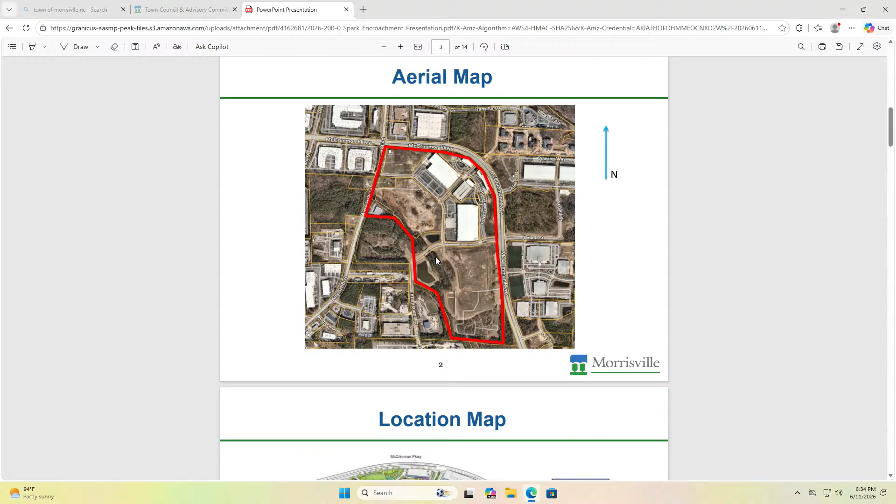Just additional orientation, here's an aerial map of the area. Outlined in red is basically the entire development area for Spark. Some of the buildings, as you can see, are already existing. It's just east of Airport Boulevard and adjacent to the McCrimmon Parkway extension to the north.

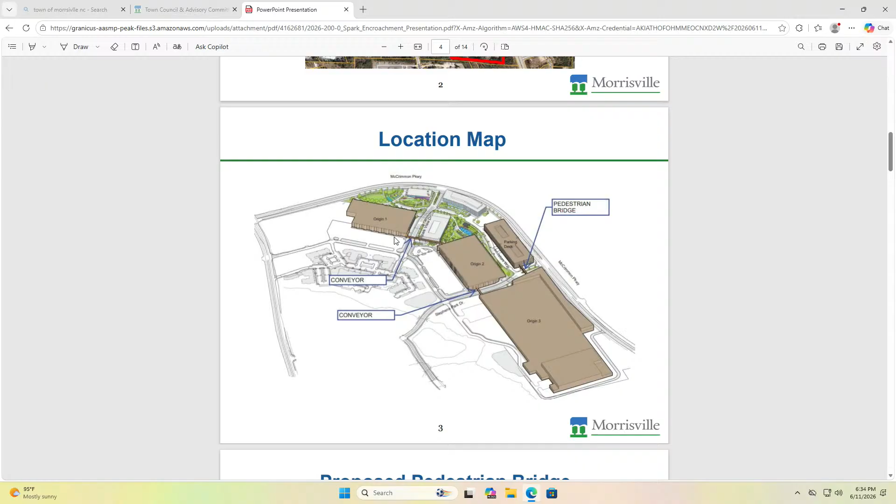So looking at this rendering, this helps orient us a little further. You have the location of the 3 bridges. There's one here that connects the parking deck to Origin 3 - that's going to be a pedestrian bridge. You have another one being proposed here - it's a conveyor bridge connecting Origin 2 and Origin 3. And then another conveyor bridge that connects Origin 1 to Origin 2. We'll get into some more details with that.

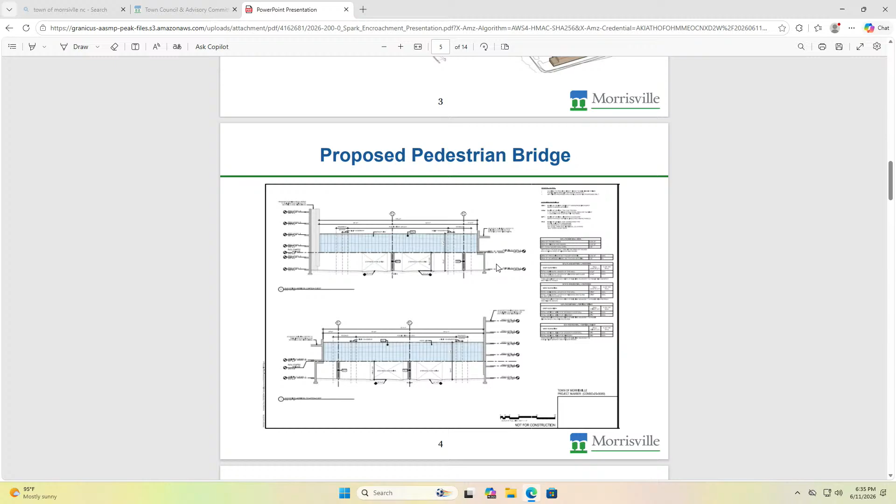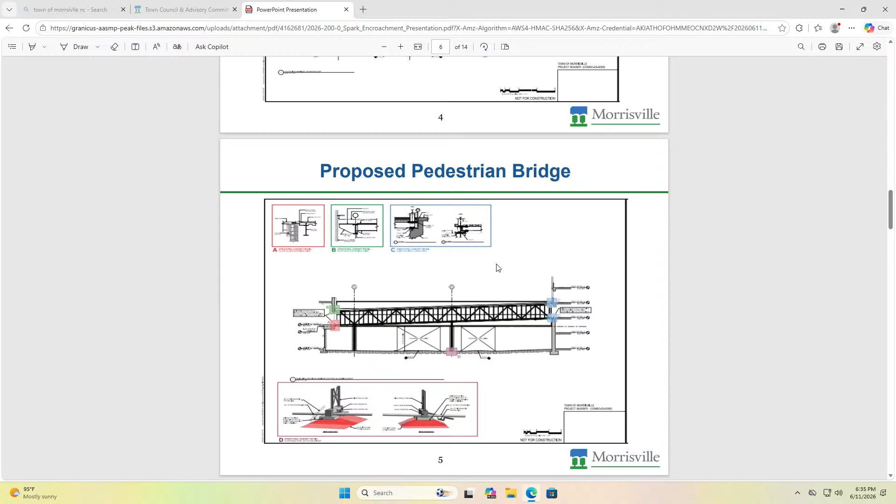So we have some structural elevations of the bridges, and the applicant has a presentation as well that's going to provide some additional renderings to make it a little more user-friendly to see. This is actually the proposed pedestrian bridge. It's going to be a steel structure cladded with glazing, so from the outside you'll basically see a glass bridge that overlaps the public right-of-way. You can see the internal section of it where it's made out of steel structure. This is a pedestrian bridge just so people can get from one building to the other.

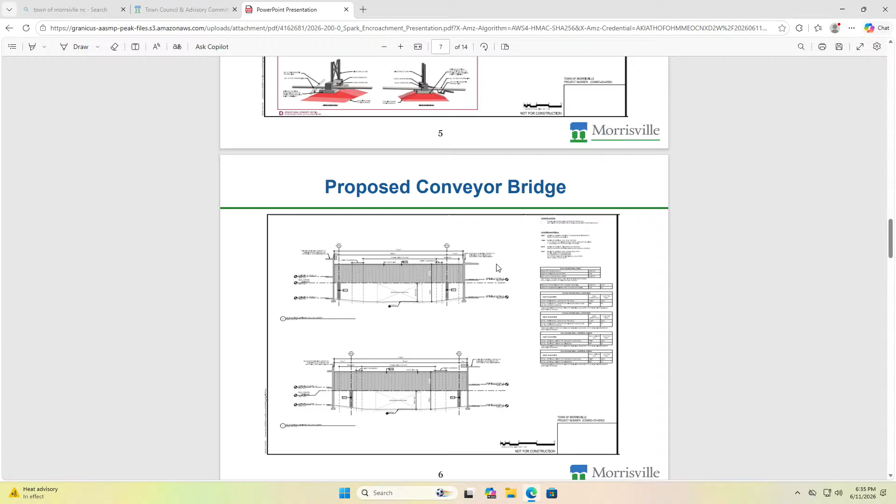And then there'll be two conveyor bridges, very similar in design. They're also steel structures, but these will be cladded with some kind of panels to match the architectural style of the existing or proposed buildings at Spark. There'll be some better renderings that you can see in a few minutes. Again, this is the internal structure of the conveyor bridge and our steel bridge structure.

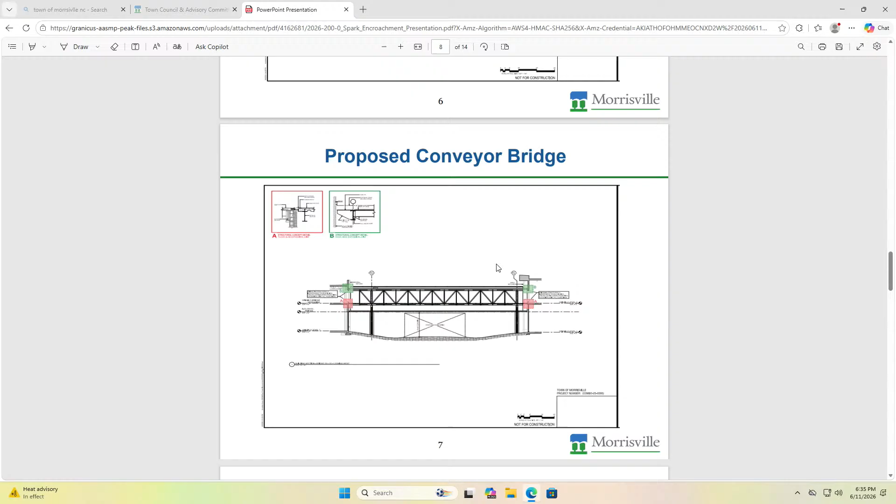When you get into the details of the UDO, it tells you in 2.5.2.24 the procedures and requirements we have to go through. We've had our pre-application conference completed internally with staff and the applicant. They've submitted documentation and completed that process. We've completed our review and recommendation of the encroachment, scheduled the public notices of the meetings, and now we're here at Planning and Zoning Board for review and recommendation.

So let's get into some of the details of 2.5.2.24. The review standards are that it complies with applicable district standards for zoning, accessory uses and structures, and all other applicable standards in this ordinance. It has to comply with our engineering, design, and construction manual, all other town ordinances, state and federal laws, and all requirements and conditions of approval of any prior development permits or approvals. It has to go through that series of requirements, and town staff will continue to make sure it follows all requirements before we issue any permits for the encroachments.

It also has to meet section 4.3.3, related to accessory uses and structures - there's a number of details there. It's got to comply with the right-of-way encroachments of 2.5.2.24.B, be located in a right-of-way maintained by either a homeowner association or a property owner association. In this case it'll be maintained by the development. They have to have written support - since they own the entire development, they have support to develop the encroachment. It's got to meet the minimum setbacks from curbs, which it will.

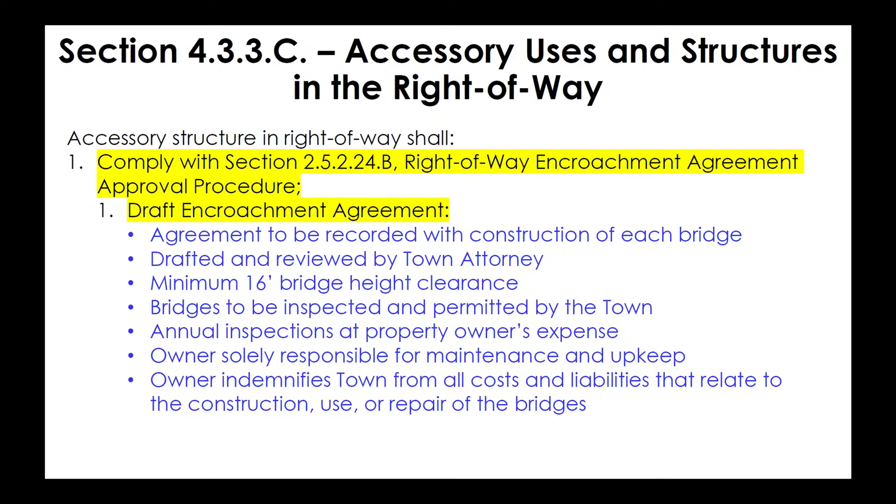As I understand it, the number one concern with encroachments like bridges is what happens in an emergency. So the agreement outlines that the property owner is responsible for maintenance. Also, the owner indemnifies the town from all costs and liabilities related to the construction, use, or repair of the bridges. That's legalese, but it basically means if someone sues the town for something that happened with the bridge, the property owner will be responsible for that.

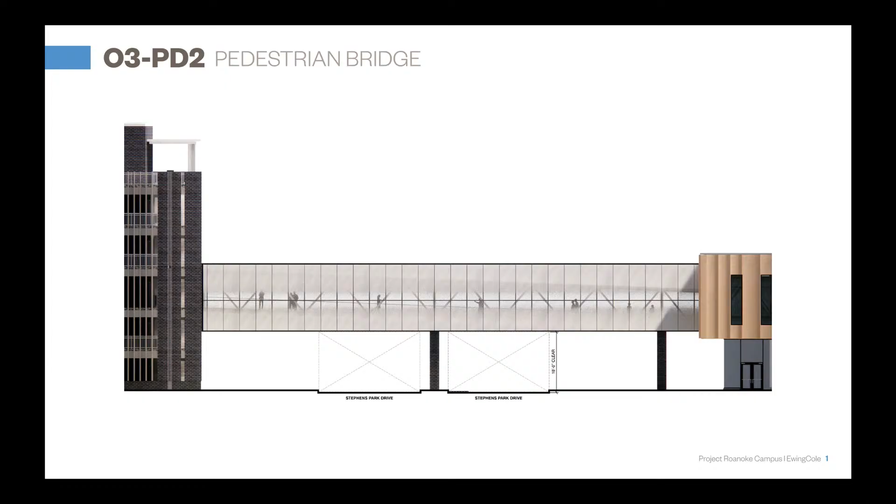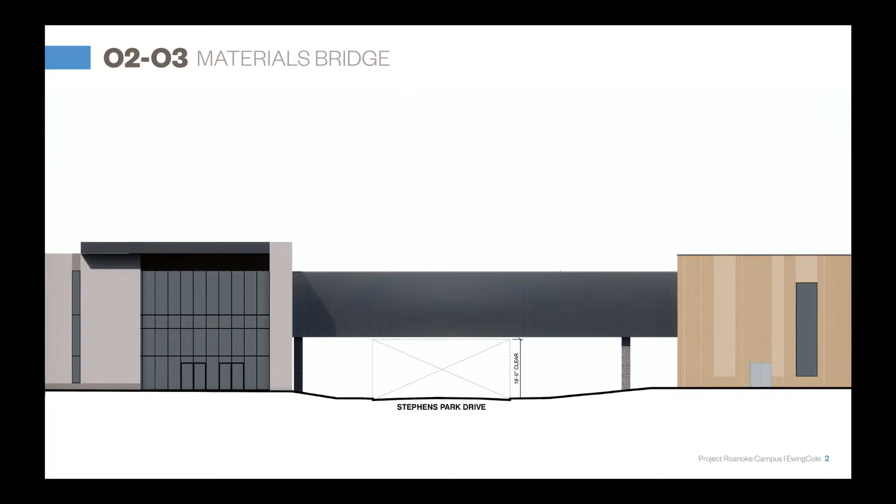And then there are two material bridges, and these look a little different because they're really a much more functional, utilitarian style bridge. They're meant to convey supplies and manufacturing equipment back and forth between buildings. The idea, which Garrettson can speak more to, is to not interrupt traffic in and out of the site, and provide a safe way to transport materials to support the facility. So this is another rendering of the materials bridge.

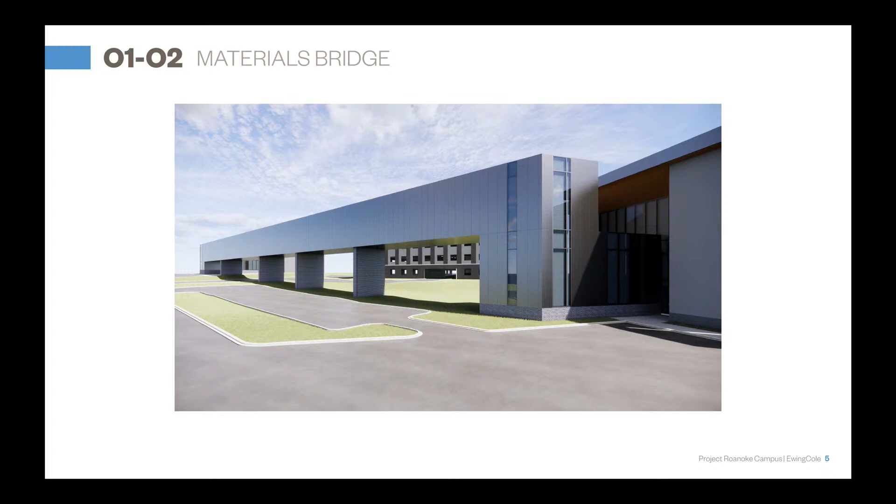This is another rendering that we thought was a little easier to understand because it's from the parking lot view. You can see the road slightly to the right of your screen going under the bridge. This is another view of the materials bridge and an initial design, same thing here but from a different angle, just trying to provide some perspective of what this might look like. I know when I first heard we're going to have three bridges, I couldn't really conceptualize what those look like.

They're not all that common, so we thought it was helpful for that reason. And then just to summarize, we have met all the requirements in UDO Section 2.5, 25C for approval of the encroachments. It complies with the use sections of the UDO, and it will comply with all other standards of the ordinance. As I mentioned, this is a long, multi-phase project. A lot of the buildings are built, and there was a site plan approval originally in 2022 for the buildings that are out there now. As part of that site plan process, those buildings had to meet all UDO requirements. For any new buildings on the property, we're going through the minor modification process to have those buildings approved for compliance with the UDO.

So there are a lot of different levels where we have to show plans and compliance to town staff to get approvals. Same thing with item 3, the engineering, design and construction manual—we're not asking for any relief from any of those requirements, so we'll have to meet those. Same with the general catch-all in item 4, all other applicable town ordinances and state and federal laws. And finally, it complies with all requirements and conditions of approval of any prior development plan.

So again, going back to that original site plan approval and the minor modifications that have come in after that, we're working with town staff. Engineers are working with town staff daily to make sure that new buildings and new proposals meet the requirements of previously approved plans. So we appreciate your time tonight, and with that, we respectfully request your recommendation for approval. Thank you.

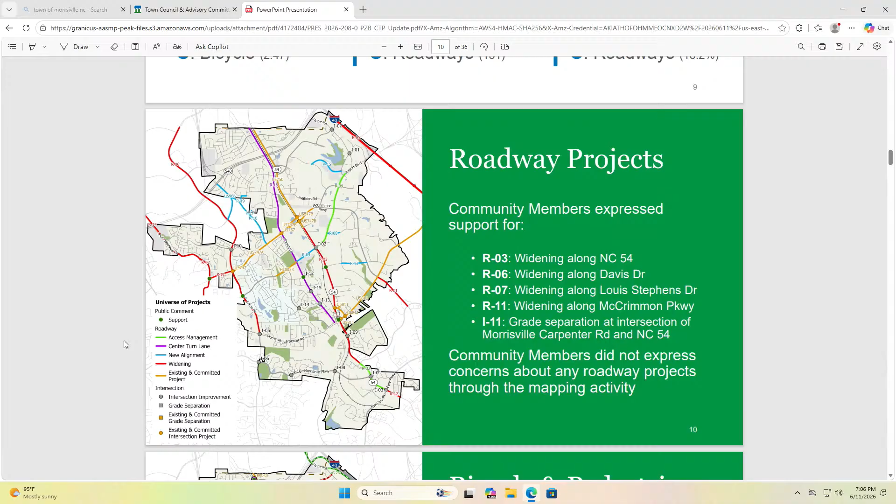On that interactive map, we showed the roadway projects and allowed folks to express concern or support for them. There were several points of support placed on the roadway map and no points of concern or discontentment. Some places that garnered support included widening along 54, Davis Drive, Louis Stephens, and McCrimmon, as well as the grade separation at Morrisville, Carpenter, and NC 54.

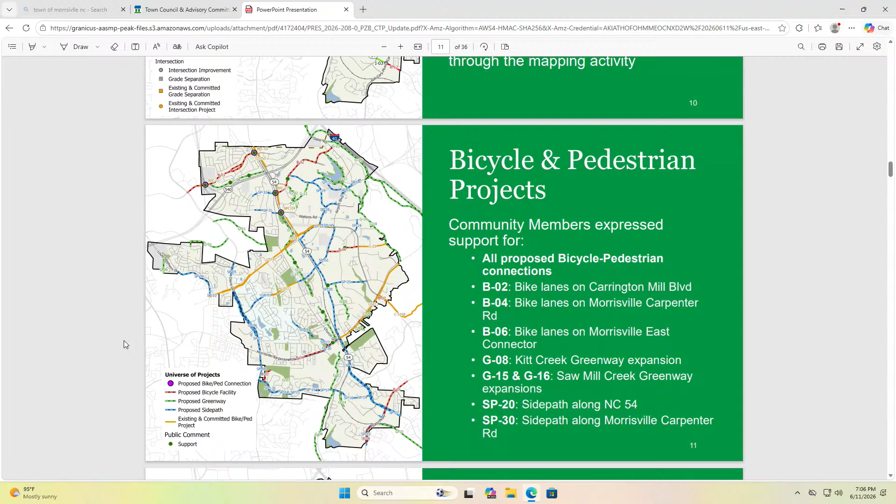Our bicycle and pedestrian projects used a similar format. They were allowed to express support or concern. Again, we had no points of concern noted on the map, and the support was a lot broader on this one than the roadway, kind of more variable. But you'll see some common things there, like the Kitt Creek Greenway expansion, Saw Mill Creek Greenway, and bike lanes on Carrington Mill, that received support from the folks that took the survey.

For our sidewalk projects, we have a lot fewer of those, thanks to some good policy. You guys have a very robust sidewalk network in the town of Morrisville, so there's not nearly as many projects. But we did see support for the installation of sidewalks along International Drive, and then installation of sidewalks on that northern portion of Church Street beyond where the current DOT project goes today in the residential communities.

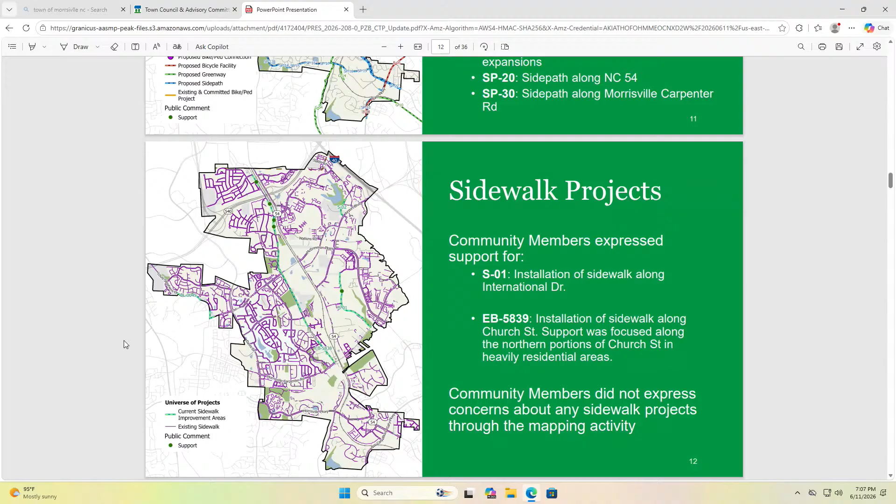And then finally, transit. This is a combination of recommendations from the Smart Shuttle study that you guys did, as well as what's getting recommended at the regional level through CAMPO and some of the Wake Transit projects. You'll see here that there was support for the BRT service, there was support for the train station, the Smart Shuttle stop at the Indian Creek Trailhead, as well as at the Double Eagles Court. But we did also have one community member express concern about the location of the transit center and any congestion or issues that may be surrounding that, more so than the facility itself, but kind of the impacts to the surrounding area.

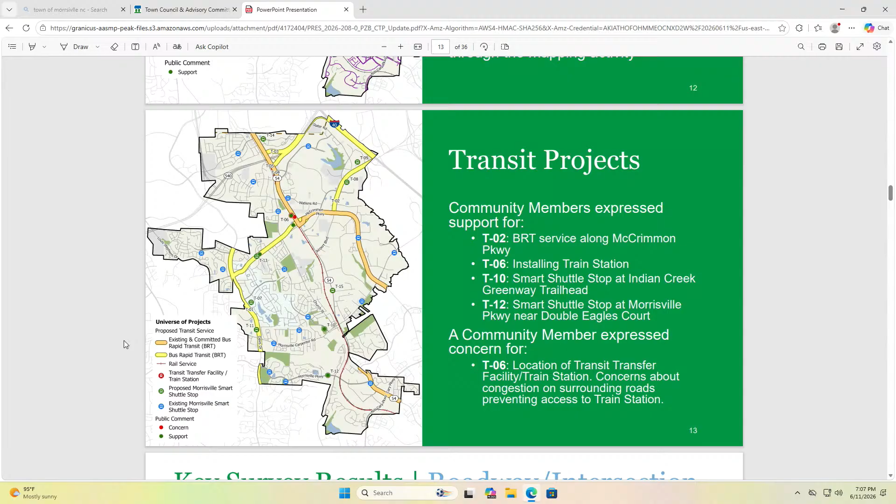All right, moving into some of the actual survey result questions. As we were thinking about how we were going to prioritize these projects, we really wanted to know, as we thought about them kind of in their modal buckets, what folks' highest priorities were within those buckets. So when we think about roadway and intersection projects, we asked folks to help us determine what our weighting criteria would ultimately be for the individual metrics.

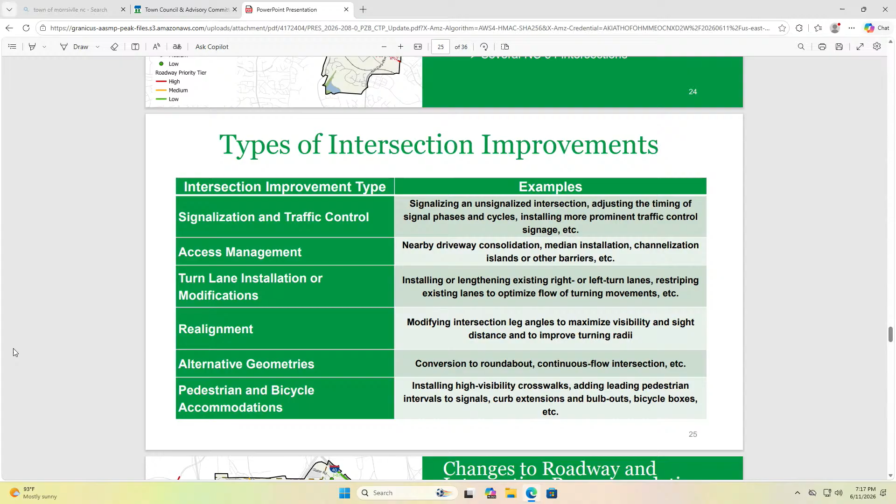The town is in the process of putting together additional studies to get into the weeds of a couple of intersections in town. To get to this level of detail, we have to know how many cars are there, how many pedestrians are crossing, where they're turning, and all of that, which isn't something we have access to at this higher level townwide study.

When we get into the changes to the roadway recommendations, there's a couple of things I want to highlight between the last plan and this one. New projects include extending Southport Drive from International to McCrimmon, a new roadway connection between Town Hall Drive Extension to Providence Place, and Davis Drive at Little.

I'll put an asterisk beside that one because it correlates with a removed project, the NC 885 Tollway Extension. As we navigated this, the desire for the tollway was not expressed by Town Council and many community members, but continuing to have more standard street access as that portion develops, especially with the new school coming in, was still strongly desired. So we reconfigured those connections to still be a new roadway connection, but more of a traditional Town Hall Drive type facility than what was envisioned with the original tollway extension project.

The Morrisville Parkway access management projects were rolled in, and another removed project, the Markham Drive project from Paramount to Sorrel Grove, has some ongoing stuff with the town for a potential future park, so that's going to be more of a local street serving those projects.

All right, final piece of prioritization. We are in the process of prioritizing the greenways independently of the other elements. With this, we're creating more finite segments. Right now our greenways in town have just kind of always been envisioned as these big, huge corridors, like the Saw Mill Creek Greenway, spanning the entirety of town limits.

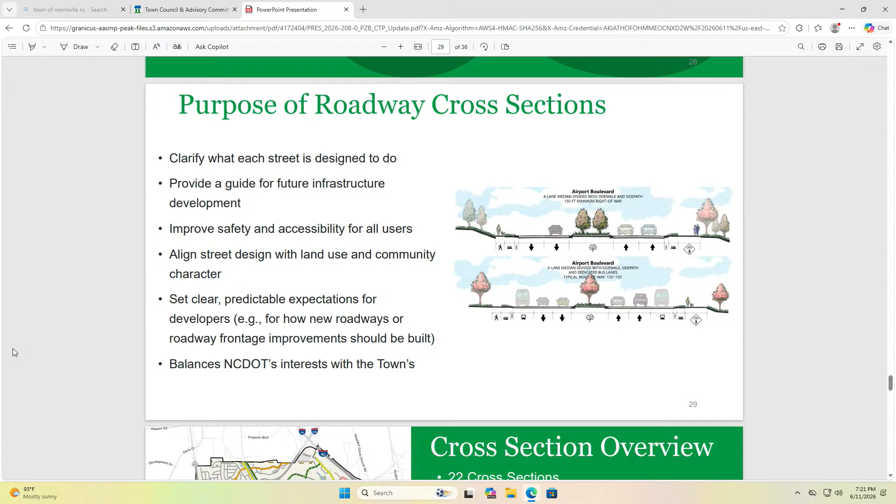They allow us to think about how the street itself and the surrounding land use context talk to each other, so that we're not putting a giant 6-lane facility in the middle of a residential area. And again, it really allows your communication and partnership with the development community to be clear, transparent, and predictable, so you can continue to attract businesses. But you can also ask them to pay their fair share and help improve the network they're going in on.

So as we think about the cross sections, there are 22 total. 10 of those are direct carryovers from the 2019 plan, and 12 are new to this plan. For each cross section, when you look at the map with the legend, there are 4 bases: 2-lane undivided, 2-lane divided, 3-lane undivided, and 4-lane divided. From there, there's a bunch of configurations based on whether it has a sidewalk on one side, a side path on one side, or a side path on both sides.

And those have been vetted to account for some of the existing conditions that have been built since 2019, as well as some planned projects for roads already in design, as well as just some modernization to account for how we understand folks want to get around now.

I'll pick on the old plan - it had some really wide outside lanes with sharrows. I'm a pretty confident cyclist on an e-bike, and I'm still not going to ride in a wide outside lane with a sharrow. I would tend to rather be in a bike lane or a side path, and I think that has been an evolution in street design since that last plan was adopted - kind of just preferences of the traveling public. So we tried to update to reflect those.

And as a county, our transit picture has evolved quite a lot since 2019, and there's a lot more recommendations for BRT running through Morrisville than there was then, so we've had to update some of those cross sections to account for how they might handle bus rapid transit.

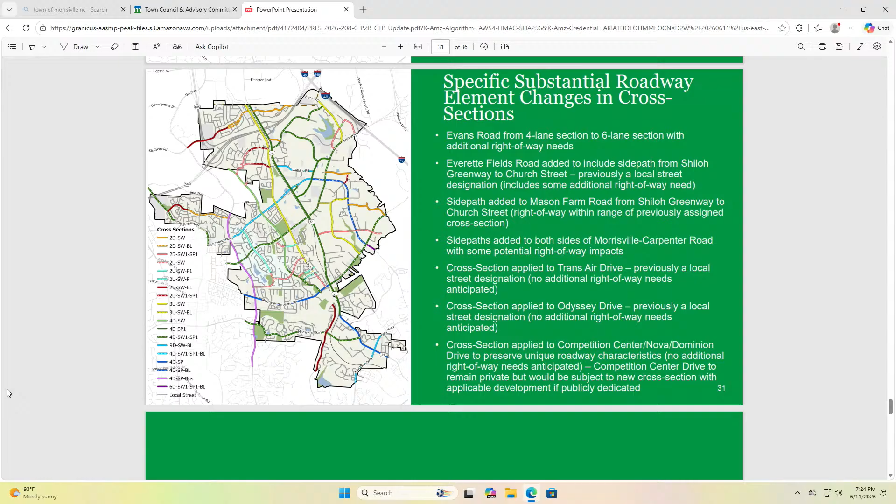The right-of-way ranges in the current 2019 CTP usually run about 20 feet, with a standard cross-section and then a modified or alternative cross-section for each one. What I'm going to do is walk you through where we have recommendations that change the cross-section, and because the cross-section is changing, there might be right-of-way impacts, though not on all of them. So I'll go through the specific roadways where there's a notable, significant, or substantial change to the roadway elements.

I'll start with Evans Road, which is moving from a 4-lane section in the 2019 CTP to a 6-lane section, and it will most likely require additional right-of-way. That's just a really small piece where you cross Aviation Parkway near McCrimmon, that little strip before you get into Cary. So that's all that would be impacted there.

Moving down, Everette Fields Road was added to the network of roadways to which we apply cross-sections. Previously it was just a local street designation, with the standard 50-foot right-of-way, 5-foot sidewalks, 12-foot travel lanes. But we added a side path from the Shiloh Greenway to Church Street, one of those future bicycle and pedestrian connections across the railroad that we proposed. So this would require some additional right-of-way—not huge, but to be transparent, it would require more than exists now and more than under the previous CTP.

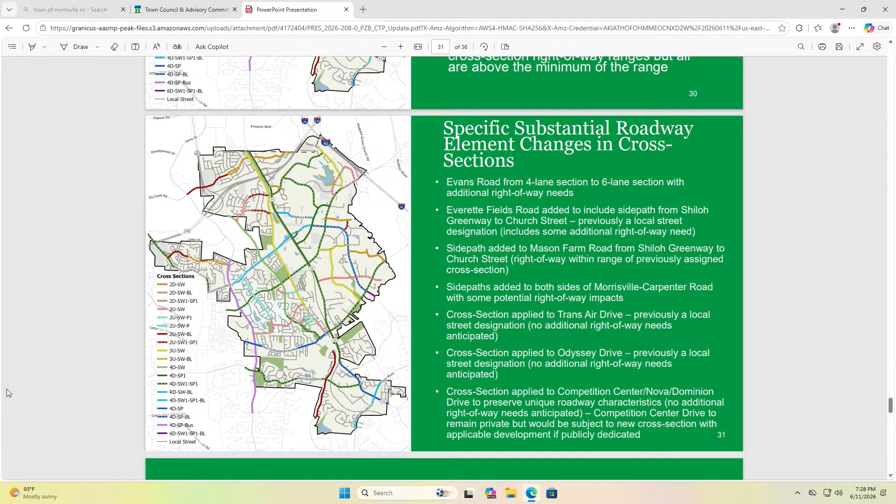Odyssey Drive is the same thing. We also applied a cross-section to Competition Center, Nova, and Dominion Drive to preserve the unique roadway characteristics of that combination of segments, with no additional right-of-way needs anticipated. One thing to note is that Competition Center Drive is currently a private roadway, not publicly dedicated. If it were to remain, it would remain private—we're not making it public by putting a cross-section on it in the CTP, but it would be subject to the new cross-section with applicable development if it were publicly dedicated.

Hopefully that all makes sense, and we're happy to take questions in a bit. Now I want to get into next steps—where do we go from here? You've gotten all this information, and we're waiting to hear what you have to say back to us. But one thing we still need to do is follow up with our stakeholders and get their feedback and reaction to a lot of this. The big ones are NCDOT, CAMPO, and the town of Cary.

But we're also talking about our targeted stakeholders in the community, whether it be the senior community, religious affiliated organizations, HSNC, that sort of thing. So we do plan to reach out to them to share a lot of this and get their reaction through the rest of this month and likely into July.

We're going to go to the town council and share this same information with them on the 23rd of this month. And then following up from that, we will begin putting together the actual implementation plan.

What I mean by implementation plan is we finalize the prioritization. We are selecting what projects go into the plan, generally the timeframes for implementation for them, cost estimates, who's responsible, what funding sources are available to implement them, and how maybe some of them should be synchronized, because all of this is a big network, and all these different projects have a tendency to work together.

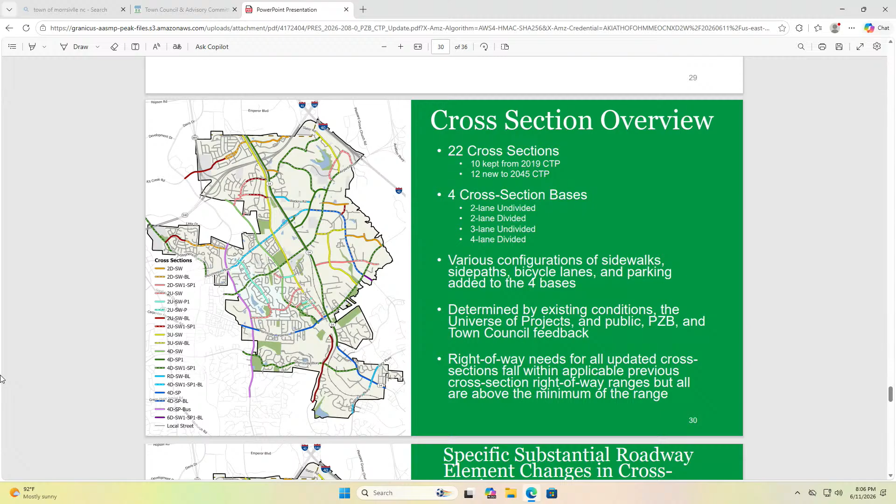Research does show that if the travel lane is narrower, it does help with traffic calming and speeding. So in some of the older cross sections, that outside lane was 14 to 15 feet. That just feels like an Indy drag strip for a driver. So by bringing those back into the 11 to 12 range and taking away that extra pavement, research does show in the transportation world that slows drivers down.

So for anyone who is a spandex rider who wants to be in the street, that is actually a positive thing, because those narrower lanes do slow drivers down.

I do want to add as well, one thing that we are looking at where bike lanes are the only option, like there's no other option for bicyclist accommodation, we are looking at adding a buffer between the travel lanes and the bike lanes.

But one of the things we have to be careful with there is some of the roadways I just mentioned, particularly Kit Creek, for instance, it's mostly a residential thoroughfare. Those residential areas are areas where it's going to be harder to get any right of way. It's already developed, so it's going to be harder. Or if you do add a cross section that requires so much additional right of way, it can cause problems, right? There can be quite an outcry.

So we have to look at, well, do we have the space to add that buffer? Now, we're talking just about a 3-foot buffer, but really that amounts to 6 feet in total, right? Because you'll have them on both sides. So that's one thing we are looking at, and hopefully we'll be able to report back on that.